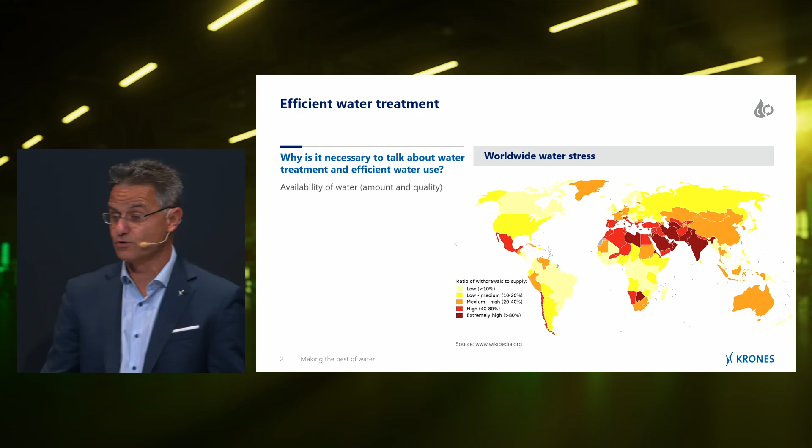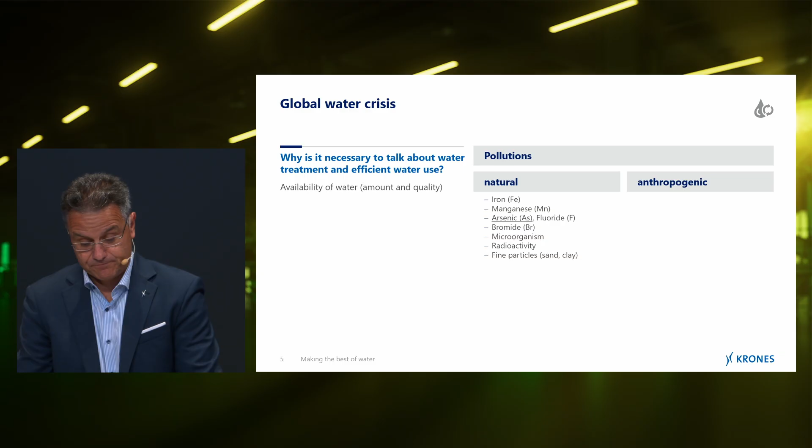Yeah, so all these impurities are unwanted in the water used for drinking or for beverage production. Sure. And therefore we have to go with water treatment. And to show you an example, there are different ways to get the required water qualities for the beverage production. Sometimes starting with a raw water tank, which is also used for adding chlorine for disinfection purposes, followed by a filtration unit. This filtration unit could be a media filter, like a sand filter, to get rid of the formerly mentioned iron, for example, or a carbon filter to reduce the PFAS or the pesticides.

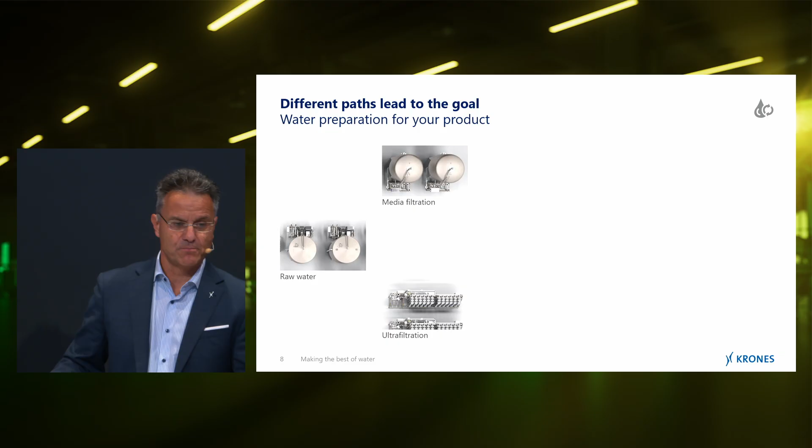An alternative filtration step could be an ultrafiltration. An ultrafiltration has membranes, and the membranes have a pore size of 0.02 micrometer. Can you imagine what 0.02 micrometers is? Not really, right? So to illustrate this, comparing the membrane pore to the bacteria, the membrane pore is a shot glass, and the bacteria is a beer mug. This is just a half, but you already know the beer mugs from the Oktoberfest. They are bigger. So it's a big size difference, and due to that, it's possible to remove bacteria and viruses with an ultrafiltration membrane. All right, a good example.

I like it. So after the filtration, we have another step for the removal of the dissolved solids like salts, to remove the TDS and to focus on the alkalinity. Both of these parameters are important for the production of CSDs or of beer. Why? Did you know that here in Munich, with the available tap water, it's only possible without a treatment to brew dark beers? Dark beer in Munich. Yes.

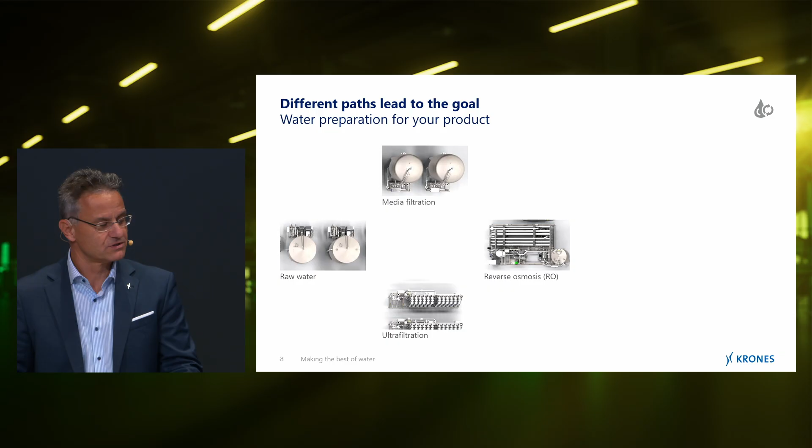Of all places. The city world famous for Helles and Weiss beer. You would have to rewrite history. This is insane. You see how important water treatment is, not only due to the pollution.

Now I understand it. So, and if we go further with this path, with this blue path, yellow path, you see the treatment which can be used for producing brewing water. And this is exactly what we have established here in Munich at the Paulaner Brewery. Okay.

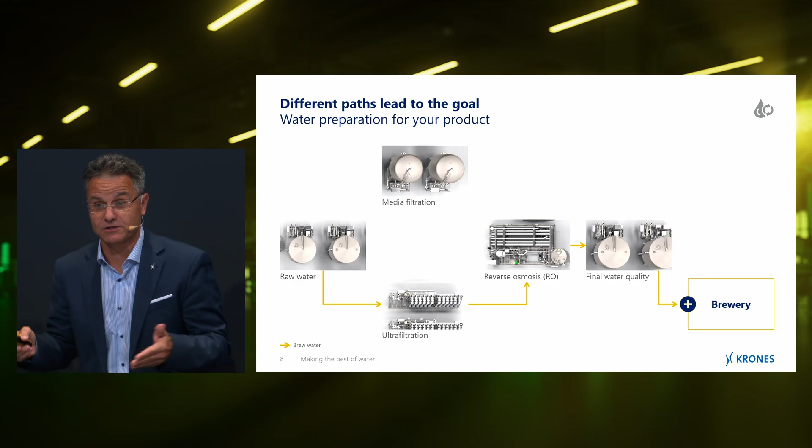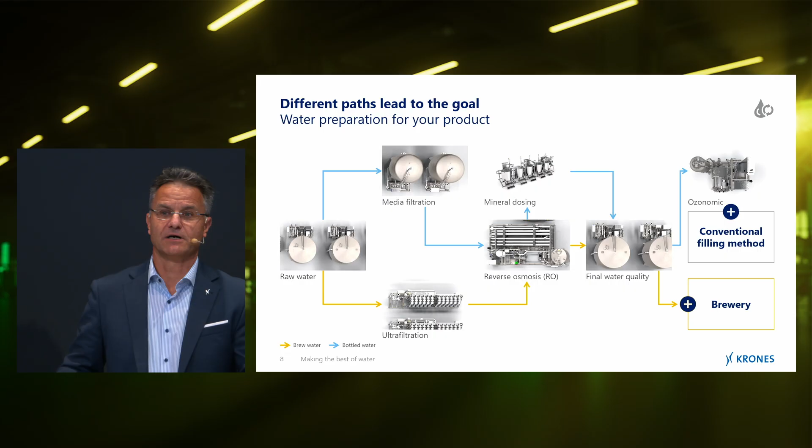Yeah, but not only for brewing water we need water treatment. A lot of bottled water productions also require water treatment, and this is another example. And there we have additional units, for example, like a mineral dosing to remineralize the purified water, and an Ozonomic system to secure the filling process. Okay, so there's a lot of options to choose from.

So when you get on board with your customer, you select the right water treatment concept, the individual design for your customers, and what's next? Yeah, we have also focused to increase this water usage ratio by our Hydronomic system, which comes with fully automatic water production and CIP processes for cleaning programs.

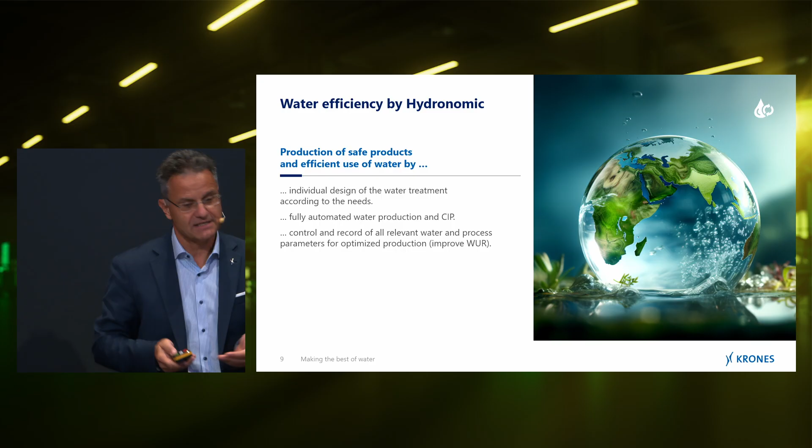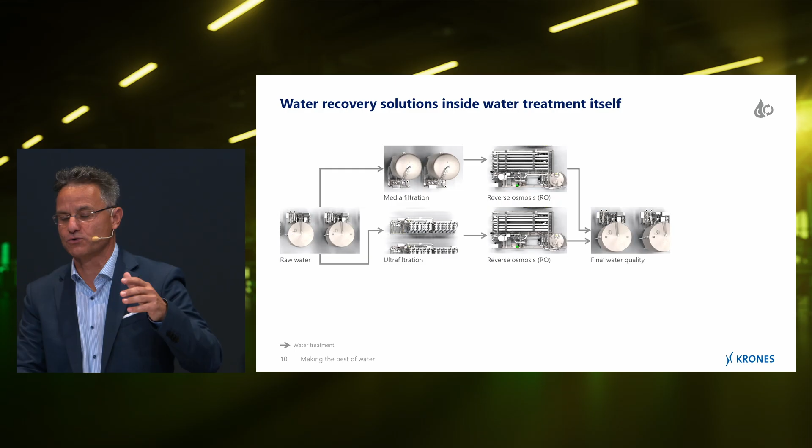Wow. And in addition, we also have the possibility of providing water reuse in the water treatment itself. Okay, now you lost me. How can we picture that in practice? Yeah, let me come back to the example from before. There is our process, and in this process it's possible, for example, to collect the water from flushing the media filter. We can collect the water from the ultrafiltration back flushing, as well as the concentrate of the RO units.

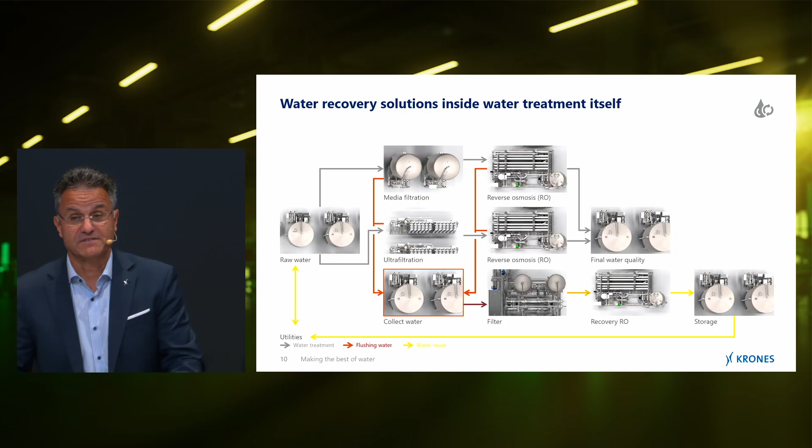And with this water we can use several treatment steps depending on the raw water quality, depending on the water treatment concept itself, and can treat the water in a way that we can use it for utilities, means boiler feed water or for cooling towers, or send it back to the raw water tank to use it again for production. Yeah, that's what we can do inside the water treatment itself.

But there is not only the internal reuse of water in the water treatment itself, there are also solutions available at Krones to focus on the whole production plant. But this is Michael's part.

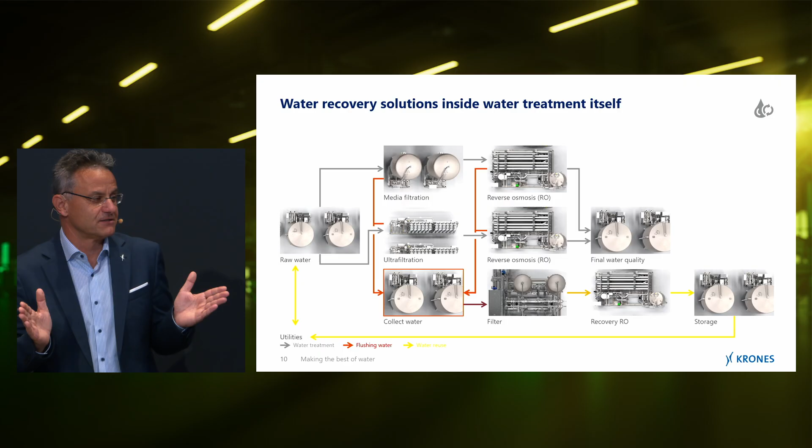Michael's part. Okay, first of all, thank you so much. This was highly interesting, and I learned again so much, so thank you for that already. Thank you.

Well, Michael, how can we reuse as much water as possible? Yeah. First, thanks for the introduction. And Jörg, thank you. My grandmother always said, don't mess with a water sommelier. And I would like to give you an idea today how to reuse water in the process again.

So, starting with a slide, we at Krones developed two systems. One system for plastic recycling, where up to 80% water reuse is possible. And today I would like to show you the system for the beverage industry, and there we can use up to 70% of water again and reuse it in the production as processed water.

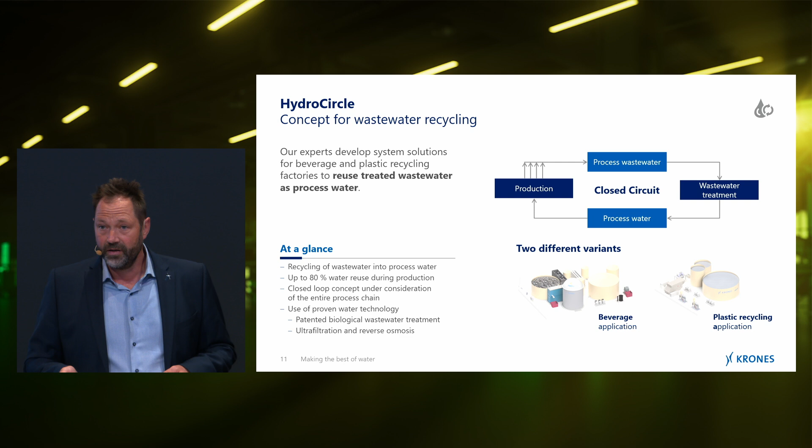So starting on the left-hand side, you see the production. The wastewater is coming and we are going over a drum screen. The drum screen is a screen to remove some spent grains, for example, from a brewery application. And then we are going to a storage tank, equalization tank, and add some acid and base to neutralize the water and to adjust the pH value.

Then we have the anaerobic stage, that's the heart of the system. And there is also biogas produced, which you can use again as a substitution for natural gas, for example. Third stage is the aerobic stage. There the sludge is also dewatered. Then comes the reverse osmosis, the disinfection, and then it goes as processed water into the production.

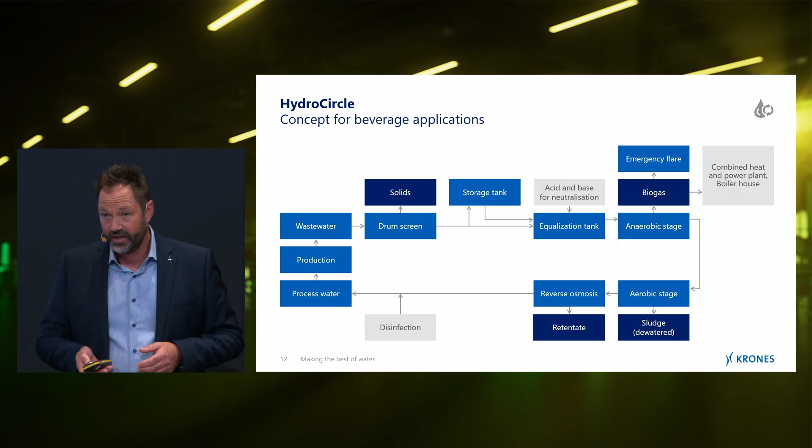So I will go a little bit more in detail in the next slide. There you can see the system in a drawing. We're starting first with the drum screen, then the calamity tank, the equalization tank, and also the chemical station to dose the acid and the base to neutralize the water for the next step, and that's the heart of the system. It's the so-called DACS reactor.

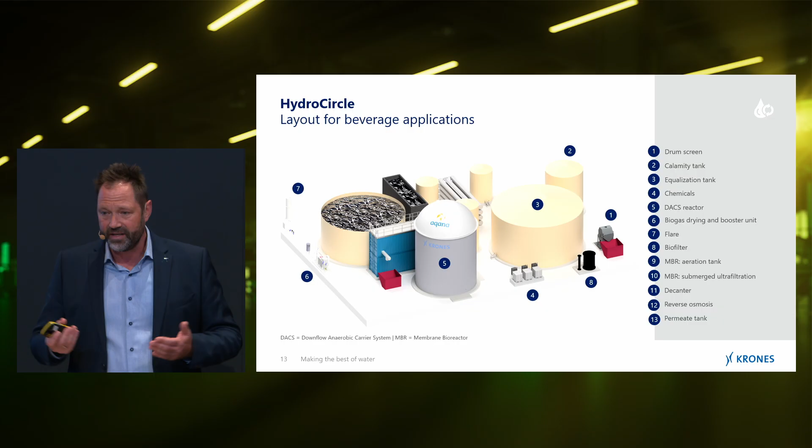We developed it together with a supplier of ours, and within this reactor we are treating the wastewater anaerobically, so without oxygen, and there the biogas is also produced. So if you are producing biogas, you also need some systems for calamity. For example, there is a biogas flare in case you don't need or use the biogas.

And there is also an installation for treating the biogas, so it has to be dewatered. The sulfur has to be removed, so you have an activated carbon filter and then a biogas dryer. And in some regions, you may need a biofilter to remove the smell from the air around the plant. So the next step then is the so-called MBR aeration tank, MBR reactor.

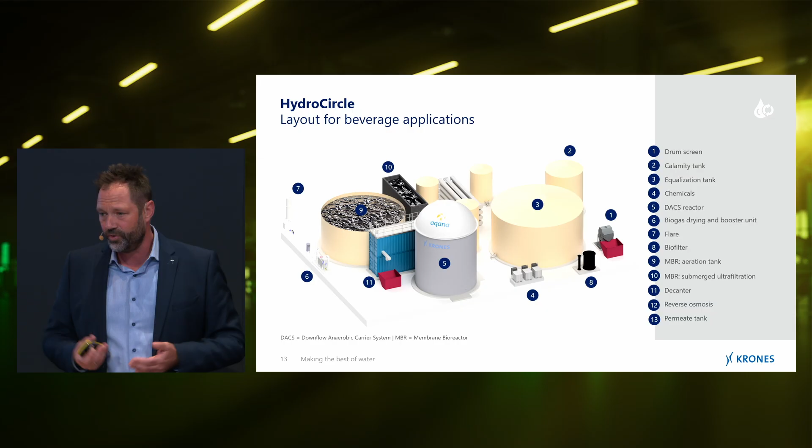There is also submerged ultrafiltration inside, and this is the second step. After this step, you can bring the water out to the municipal wastewater treatment, for example, or release it to a river. So at this step also the sludge is taken out of the system, is dewatered, and then has to be brought out of the system.

And then, Jörg, we are coming to your part again, back to the roots where we are coming from. Krones is the reverse osmosis, and within the reverse osmosis we treat the water in the last step. There is then also the disinfection, and then we can use the water again for SIP, for example, or cooling towers, or heating vessels. So this is the way we treat the water back again and use it in the process.

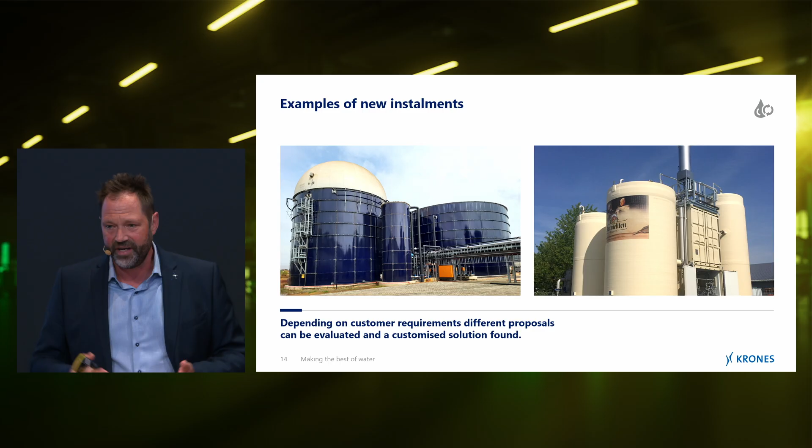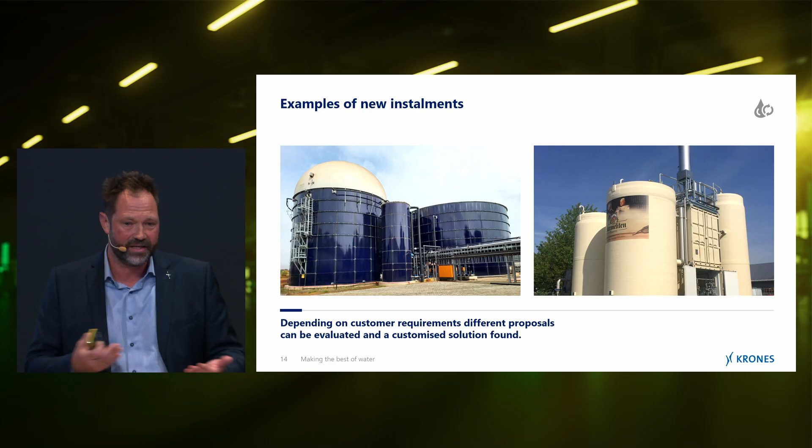And I would like to invite you when you're coming to Neutraubling. It's next to our headquarters, a smaller brewery in my hometown, so we can go there and see this application on site. You can talk with our customer, he's very satisfied with this solution, and I can show you each part in detail. That is a unique opportunity to really get an exclusive glimpse behind the scenes. So obviously your customer is very happy with you that he invites everybody in to show off this amazing plant.

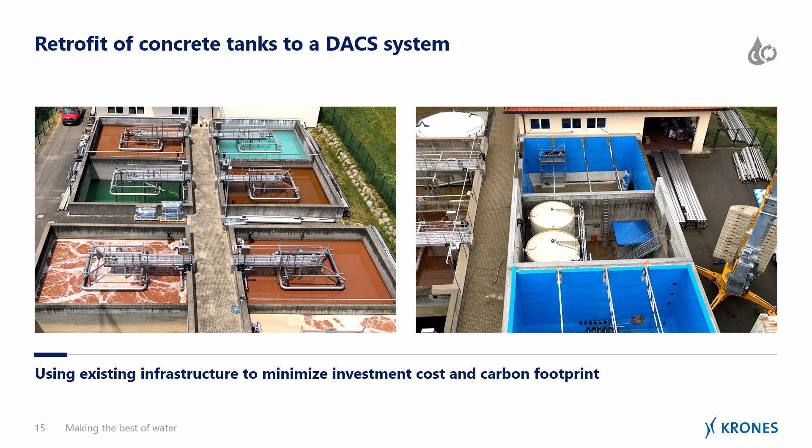Awesome. Is this only possible for greenfield, or is it also a retrofit solution for brownfield plants? And if so, how would that work? It's also possible for brownfield. On the next slide, on the left-hand side, is a brewery in the Black Forest. There are some concrete tanks, a huge space demand. And on the right side, there is the DACS reactor I just showed before, and the MBR. With this system we can have a much smaller footprint. So this is also one of the advantages of this system.

Imagine a brewery in the center of an old town. No more space. Of course, in city applications. Exactly. And many old breweries, for example, are in that area. But that is amazing. But I do know that you never rest on your laurels. Yeah, but one slide. Maybe let's just sum up.

Sure. We have comprehensive consulting, like Norbert here, my colleague, who just presented our consulting group. So we don't do just wastewater, we're also doing energy efficiency. As I told you, up to 70% water reuse is possible. It's a tried and tested technology, also patented technology, high hygienic standard. Jörg? HydroCircle system and a reduced space demand.

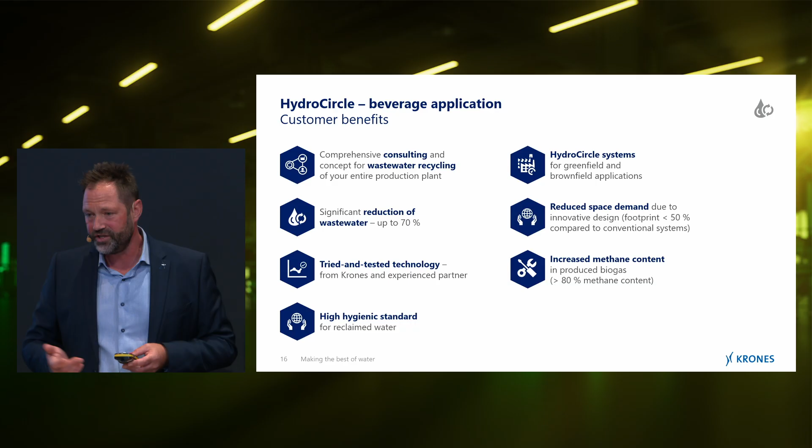And also to be mentioned is the high methane content, because normally in biogas or farming applications you have a methane content of around 65%, and here with our systems we are reaching methane contents of more than 80 up to 90%. Incredible numbers. Thank you so much. First of all, an applause for these impressive numbers and the good explanation.

But as I said before, I know that Krones never rests on its laurels. You always have your ear to the ground. You always try to become even better for your customers, together with your customers, growing together, learning from each other, exchanging ideas. So is there anything new in the pipeline, any new projects you can already share? Yeah, I would like to show something. We are going further. The beat goes on, I would say.

We are working on the solutions beyond tomorrow. We just jumped into a project with the Technical University of Munich, Regensburg and Nuremberg, and there are plenty of our customers within this project. We are thinking about solutions to treat the water within the process, not do the big bang at the end and put all the wastewater together. So we are looking for single solutions in the production, and that's what the project focuses on for the next 2.5 years. Many little steps eventually lead us to our ultimate goal.

It's amazing. Thank you so much, Jörg, Michael, for the great introduction of your systems.